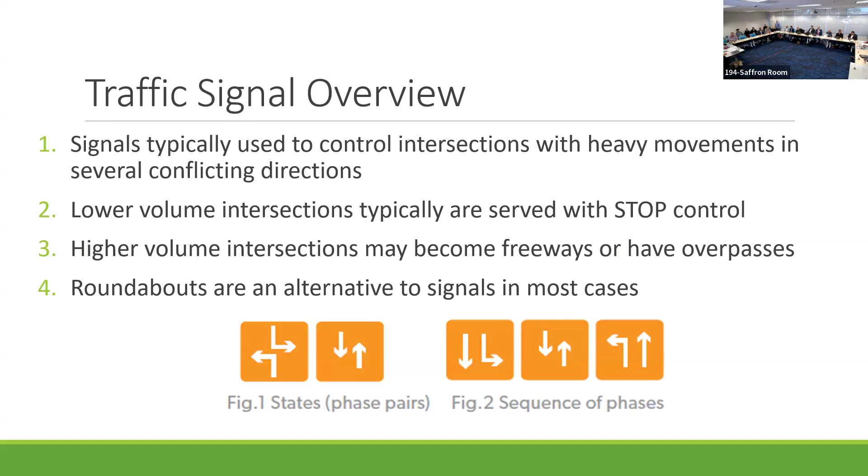I'm the principal engineer at TAMC, and we have an item in front of you today about adaptive signals on Highway 68 between Salinas and Monterey. I think everybody knows what a traffic signal does, but where it lies in alternatives: you usually use a traffic signal if you have a lot of movements going through an intersection that are heavy and all conflicting, basically they can't all go at the same time. Lower volume intersections typically can be served with stop signs, but you get collisions and side street delay concerns. So when you get to higher volumes, you either go to a signal, and if it gets that big, you go to an interchange or a flyover. A roundabout is an alternative to a signal in most cases, but we're not here to talk about roundabouts. What we're here to do is talk about what we can do on 68 to get the most out of the signals we have there today. There are really three operations that happen: we're allowed to do free and coordinated with the equipment we have now, but we are not able to do adaptive without doing some upgrades. So when you're free, uncoordinated, it's basically first come, first serve.

You rarely are sitting at the signal with no traffic going. It'll zip around and come to you pretty quickly when that happens. It's in a very well-defined sequence, and if you watch that signal, you'll know when you're next in line. It's very flexible in that it treats everyone evenly. It doesn't give any priority, so sometimes it'll give the side street a little more time than you'd rather have, because the main line is going to stop at every intersection. So you don't get any what's called coordination.

Coordination, you set up - and I probably could talk days on this. With coordination, you say I want the signal to run every 2 minutes. You do the side streets, you do the left turns, and then you just sit on the main line, in this case 68, and it's going to stay green on 68. Whether there's cars on 68 or not, it's going to stay green, and that allows us to coordinate them. With that synchronization, you can get a good progression through the whole corridor.

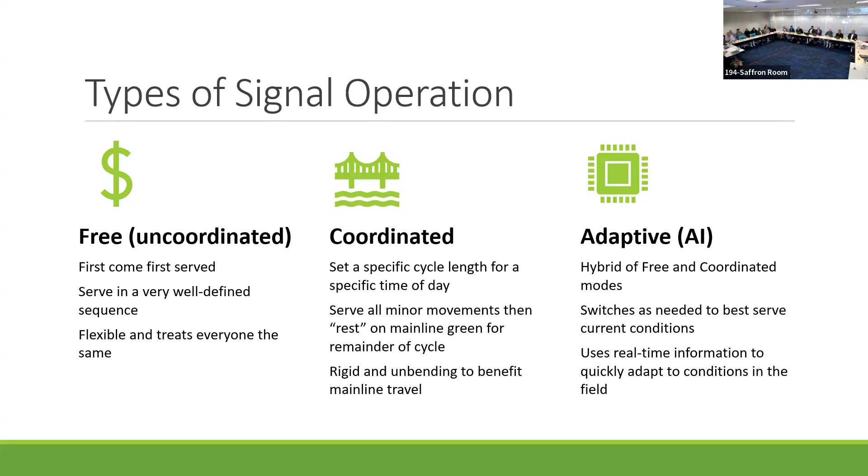And then we have adaptive, which is basically a hybrid. You get artificial intelligence involved, and it starts thinking - is it time to be free or coordinated? That's essentially what adaptive is. It's flipping back and forth between that. When it's free, it's making the best out of free. When it's coordinated, it makes the best out of coordinated. And the reason why it works is it gets real-time information - great information. We'll talk about that high resolution data, but that's the game changer.

So as far as I can tell, this is about all you need to know technically, but I could answer technical questions. Each one of these has its weaknesses and strengths.

When it's off-peak, light traffic, middle of the night, free's fine - it's probably the best option. If traffic's real light, you're good. If it's coordinated in the middle of the night, you're going to get nothing but complaints. People are going to say, I'm waiting here 2 minutes, and every 2 minutes I get my service.

Adaptive can work great. It could say, you know what, it's not light, it's moderate to light. And it can switch from free and say, you know what, there's enough traffic that we should do a progression.

Peak hour, heavy traffic, free is terrible because you're going to stop at every light if you're driving down 68. If you're coordinated, it's great - you just open up the floodgates. Caltrans just changed the timing plan on 68, coordinated Monday, and it runs so much better with the new coordination plan. It gave it more green time, opened up the floodgates.

Adaptive pretty much mimics coordination in this case. If you're going to open up the floodgates in coordinated, the adaptive will be great in that it might open them up a little earlier and keep them there a little longer, but at the peak of the peak hour, they work about the same.

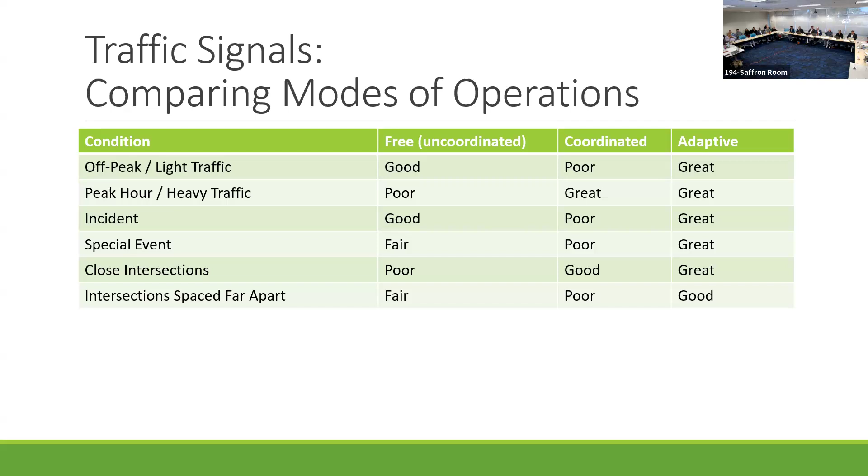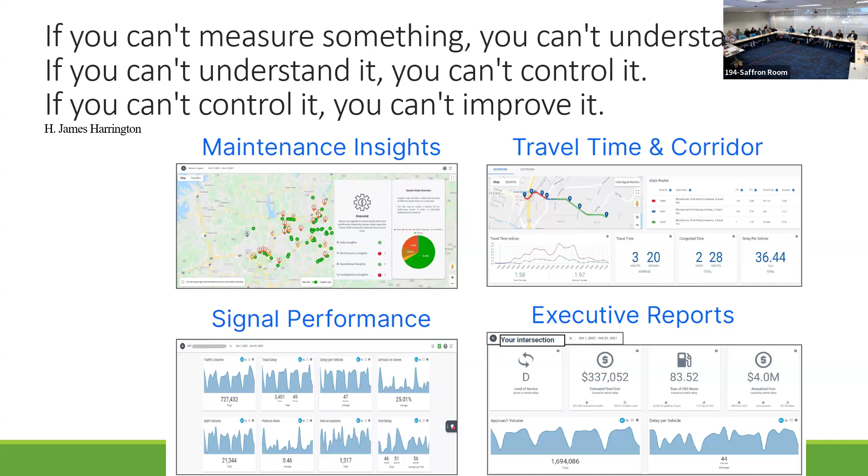The takeaway is artificial intelligence is learning. It's learning from a human. So you have this data, but you don't just push a button and walk away. It's going to be a commitment from Caltrans, I hope, to be looking at these graphs, to be looking at these things, to fine tune it, see what adaptive's doing right, what's wrong. Where I have seen adaptive fail is when staff didn't embrace it and they pushed the button and walked away, thinking it's artificial intelligence, it'll figure it out. It's getting better at doing that, but it does have to learn from mistakes, learn by doing.

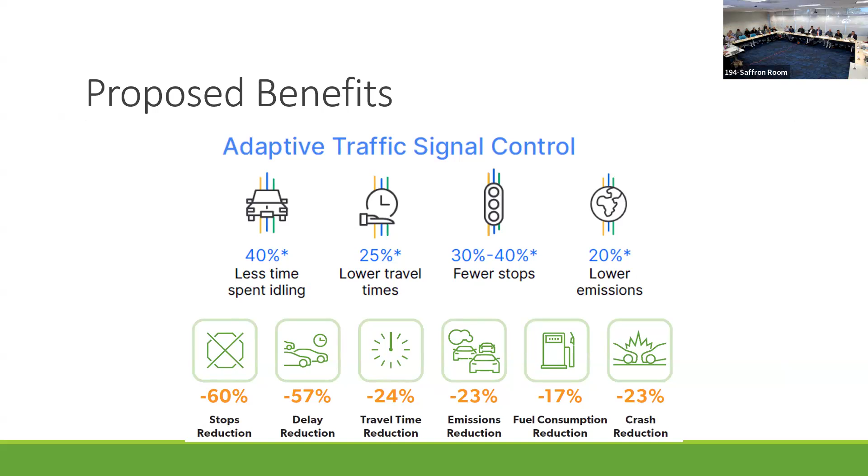And it depends on what you're starting from. So if you're starting from free signals, which a lot of these—I'll have to say that's probably what the vendor did. If I did it, I'd say the signals were running free on a big, busy corridor, and we got huge results. We're not going to get maybe the same results because we're already in coordination, but I think it shows here, it's very promising. Definitely something we want to do. Very excited to look at that.

And so what we're proposing is Caltrans. I'd like to introduce John Olejnik, the planning director, to give us an update on the Caltrans project, the pilot project that they submitted. Thank you, Doug.

And it's true, he is so enthusiastic. We love working with Doug on these projects because I learned a lot as well.

I'm John Olejnik, Caltrans District 5, our engagement and planning manager, and glad to be here today, and glad to be working in partnership with TAMC on this endeavor. While it's true we did apply for, but were not successful in, special competitive funding to acquire equipment, what we did acquire was approval to do this project along with TAMC. So that was good, and we're glad we've accomplished that. We're glad to be at this point now to help move this forward.

We'll be working from this point onward, with the cooperative agreement in place, to be able to figure out the means and the methods by which we get it installed. We want to see this play out. We're very curious to see how this pilot program will work. Certainly, these AI controllers are not a substitute, not a replacement for the need for the long-term overall improvement project, but it is something we're interested in piloting and seeing how things play out. We'll be working together as we go forward. So thank you.

So we have that update, and with that, it flipped back to something that was going to be maybe shared funding, where TAMC pays for the second phase and Caltrans would get the first phase. The pilot project, we flipped that, and now we're proposing to take on the first phase funding.

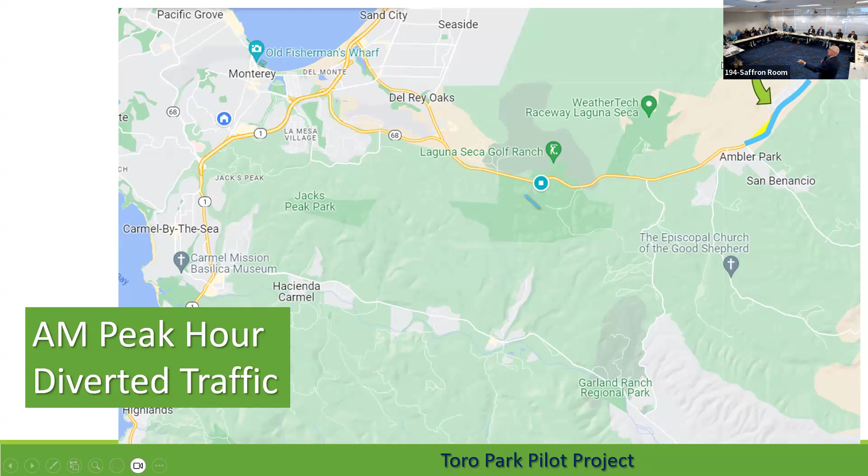This is all the traffic trying to get from Salinas to Monterey. They say Highway 68 is so blocked that we have to use this. I heard how bad the traffic was and envisioned this, and I said, I've been around, I've done this for 30 years, this isn't that bad. And they said, oh no, it's the neighborhoods. I get it, Portola was built for a little bit of extra traffic, and it's by a school. That's not desirable, we don't want that.

And what happens is, before it gets congested on that street, they start driving as fast as they can to beat the traffic.

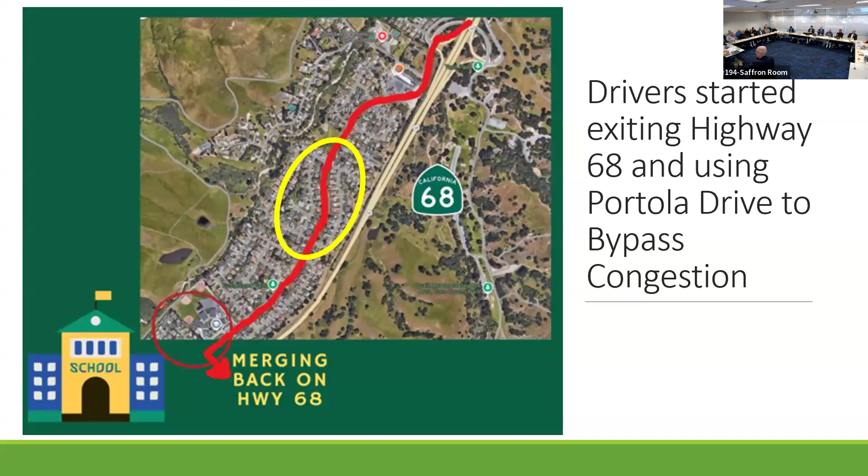So you have everybody we talked about from here to there is aggressive drivers trying to beat the traffic, maybe passing 5 or 6 cars literally to get just a little bit more, to get to work faster. And so what happens now, again, you have the school over here and this traffic coming down. And in this middle part here, when school is in session, you see this happening, and we call it bypass traffic.

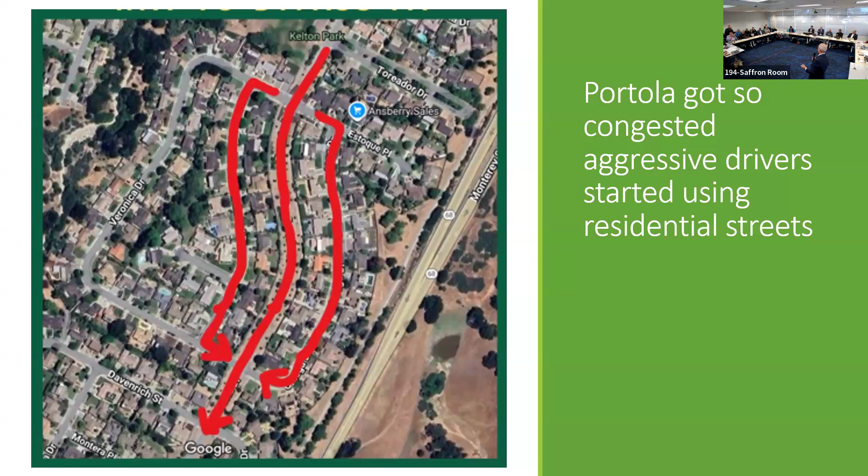Now, this is one that I had never seen before. And when I got to this point, I was like, this is a different animal. This is something that just is not acceptable. What I mean by that is, this is a residential street. And this happens regularly every morning.

And when people said they couldn't get out of their driveway for 20 minutes, I thought, you guys are exaggerating. And then I went out there and saw that. I said, you guys are not exaggerating. This is crazy. This is not what the road's built for. Your roads are going to break down. Your pavement's not designed for this kind of traffic.

The people literally, when they get out of their driveways, can't move out of the way without going the wrong way, and I have tons of pictures. Other places I think is exemplary, but people start driving the wrong way on a street. They start passing dangerously. We're all in a school zone.

So, not desirable. So how do we build consensus on this pilot project? In February, Toro Park HOA invited us, Todd and I went to a meeting and we looked at each other and said, you know what, we'll study it. And that's what I found out in the field, I said, you know, we've got to do something.

And again, when we said 6 to 12 months to design an adaptive system, which is probably one of the easiest designs you can do in traffic engineering, look at the timeline we did on this. It's remarkable. April 3rd, we had our first workshop with the community. That's February to April, we have a meeting and we kick off the project.

We set up a traffic committee from members of Serra Village and Toro Park. We're no longer associated with either HOA, in that we don't ask them to vote on it, and we're not getting input from the HOA officially, but we've used them as a good connector with the community. So they identified people from each part of the neighborhood that would help us design.

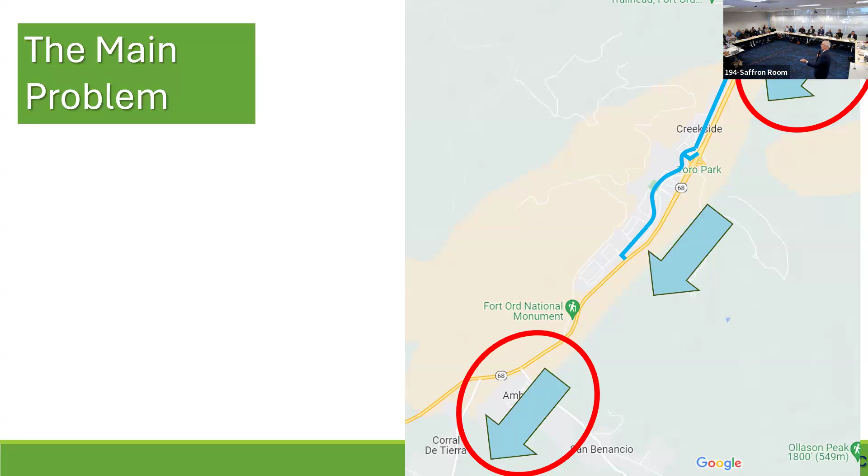So you have to remember, we're not changing those, we're changing what's in the middle. And what you have is, instead of a lot of traffic going on 68, about half of it gets off and comes back on. And it just doesn't work at all.

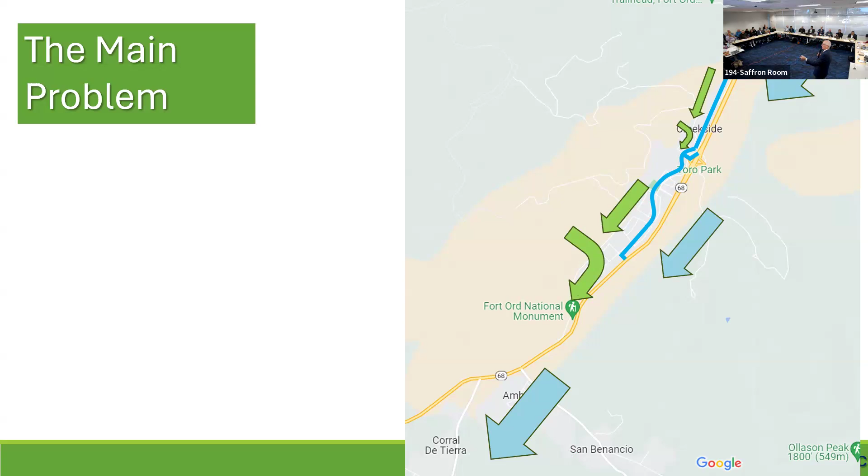And so phase 1 was, let's get rid of this exit traffic. So we blocked the exit traffic. And then what that did was, a lot of people in the neighborhood who were getting out on this right turn, we blocked the through traffic, but we also redirected all the neighborhoods. So you're going to see, and we'll get there, all the people on the west side of Toro Park now have to go all the way back, do that U-turn, and get stuck in that terrible traffic. That is really a negative about the implementation that we have to address.

So now all of a sudden you have more traffic on 68. We're kind of back to normal until people started getting off at River Road and going in there. Now they're getting off on Portola and just getting off and getting back on. When you see this dire need to make a 5, maybe 3-minute difference in a commute, you just see bad driving decisions.

So what we did was we tried to teach them, say, we got to do phase 2, which we already had gone through. We just didn't know how quickly it was going to, or if it was going to be needed, but we did this systematically. We got rid of the Creekside entrance, and then the same thing, it went to a U-turn. So now we're pushing the traffic back on.

In an ideal world, we wouldn't have had any change on Highway 68. It would have been the same traffic from Salinas, the same traffic going to Monterey. However, what's been happening gradually, and it happened for some reason, the Imjin Road project, a lot of traffic started using 68 for one reason or another. Even though the construction was going on for a while, we got a bunch of traffic there. Davis Road got closed, a lot of traffic came over. Hitchcock, a lot of traffic came over.

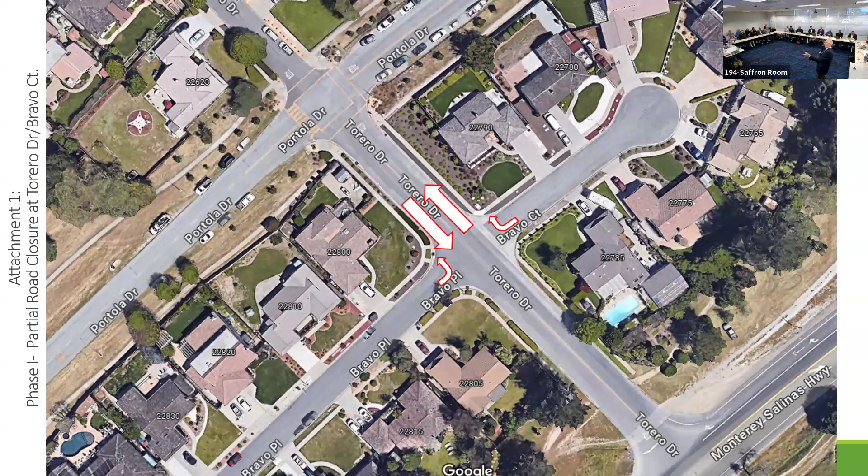So this is where we are now. I'm going to just take a look, for those that didn't know exactly what we did. Torero Drive was closed, and it looks like this. So that's not the most attractive thing, but it's a pilot project. Remember, the time we got it in, we got this in before school started in August, and we were asked to study it in February.

That's a tremendous turnaround. So what happens if you do not follow the signs? CHP has been out there, they've been one of the best partners. Jessica's just been a phenomenal leader. I'm sorry she couldn't make it here, but I know she's busy writing tickets. This was literally, we were talking, and this guy looked both ways and went right past it. So it was pretty startling the first day.

I drive there pretty often, that's my commute to work. I don't see many people, but of course, if everybody followed the rules, we wouldn't need police officers. It's done a good job here in that the few people that I see doing it, it's not usually in the peak hour, and we have a plan on that, but yeah, it's worked good in the peak hour.

Before, there was 550 trips making a right turn, and most of that was cut-through traffic. Maybe 100 was the neighbors, and 650 trips on 68. That's a 50-50 split. Half of the people that need to use 68 were saying, I'd rather drive through the neighborhood. It just didn't make any sense. And what was happening for those that drove it, it was almost like a stop sign installed at Torero, where it's I go, you go, I go, you go.

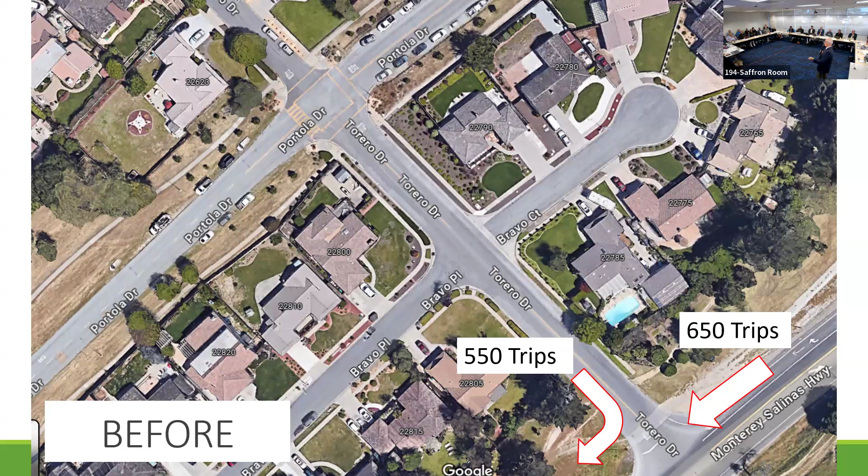The very generous drivers were terrorizing the flow of traffic on 68. It was terrible. So what we did, we got rid of those right turns to zero. I think we counted 3 per day, and then it all went on to 68. And I think I said earlier, we did finally get the traffic signals. We tried to get the traffic signals coordinated 6 months ago, 5 months ago, 4 months ago. We got it done Monday. So we got the first step, and again, adaptive will even make it better.

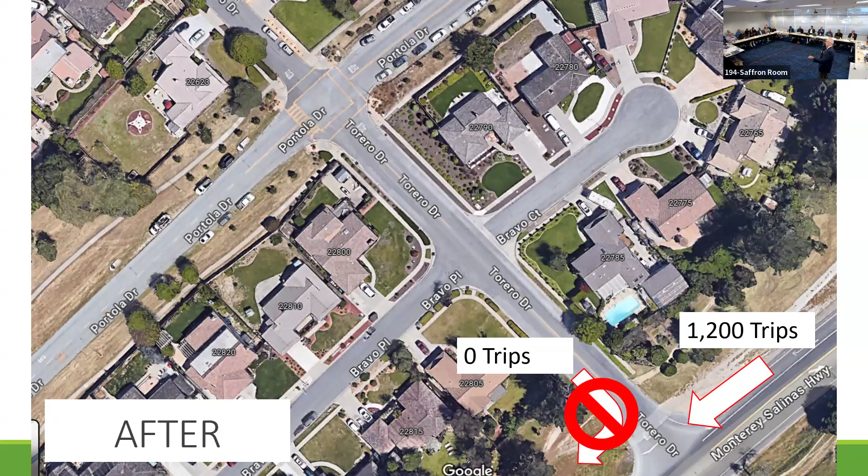But a little bit of the frustration was that the signals weren't put in. The coordination was done in collaboration with this, a little offset. And so when we got that extra 1,200 trips down, they were just stacked up, and we had quite a bit of backups.

So this is probably more, I just was kind of impressed with how much we did, and the people here. I think there's quite a few members. Harry, Terry, we have so many people that are part of the neighborhood that helped out taking counts. Harry was out there helping us monitor, and that's what we did. We put something in, we looked at it, we adapted, we did the next phase, and now we're at a point where we ran a community workshop, our third one.

School started August 7th, and a week before, the school district said we really have a problem with our drop-off area, can you fix that too? So with 4 days before our kickoff meeting, we put in the project and it worked good. The school district asked for help with the design, and I said sure, I'll go out there and see what I could do.

It was pretty bad. That big X shows how traffic was going through - it was terrible. So we fixed that up. We put some temporary improvements there the day before school. It's not pretty, but it works.

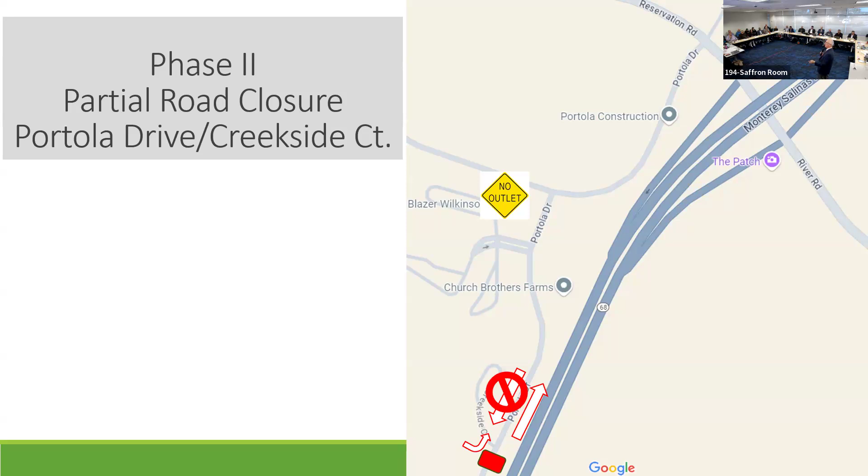Now, what it did cost us is the next question. But here, we had about 250 trips coming through, and it went down to zero. So it worked - what we wanted to do was get rid of the cut-through traffic, and it has worked great.

On October 8th we did a workshop, and I'd love to go over this - it's pretty neat. We asked two questions at the same time. We go into depth in the staff report, but it's not fair to ask do you like this or not and just see who raises their hands. So instead we asked where do you live, and broke up the groups by location before asking the same question.

The people more west on Toro Park, I could confidently say, are going to be opposed to it because they had to lose those U-turns - they got the most drastically impacted. As you get closer to the interchange, that group says this is the best thing that could ever happen to us. As you get to Creekside, they're like this is terrible, but on the other side of the barricade they think it's great. So it's not fair to say we have a consensus in each area of the study area.

But it was pretty neat - everybody got in there, put the dots up, and I got some statistics for anyone that's crazy about that.

It was pretty cool. We asked this question: what do you think coming here tonight, and what should we do next? So we asked 2 questions, and if you have some time, I think it's a really neat survey tool.

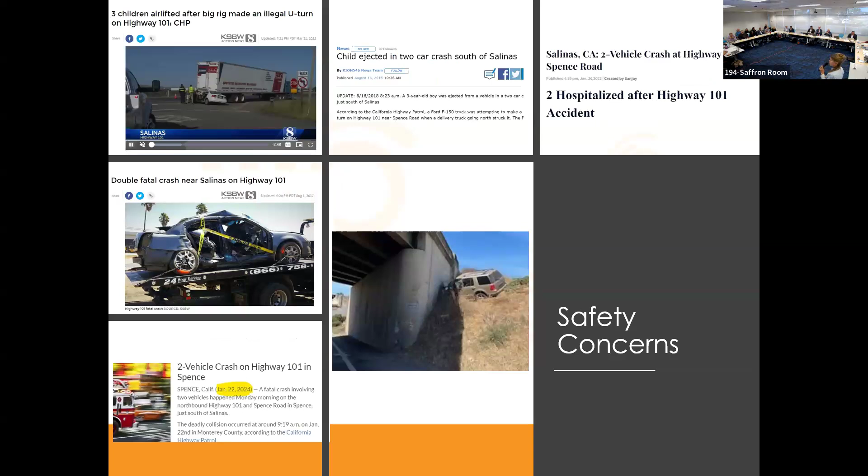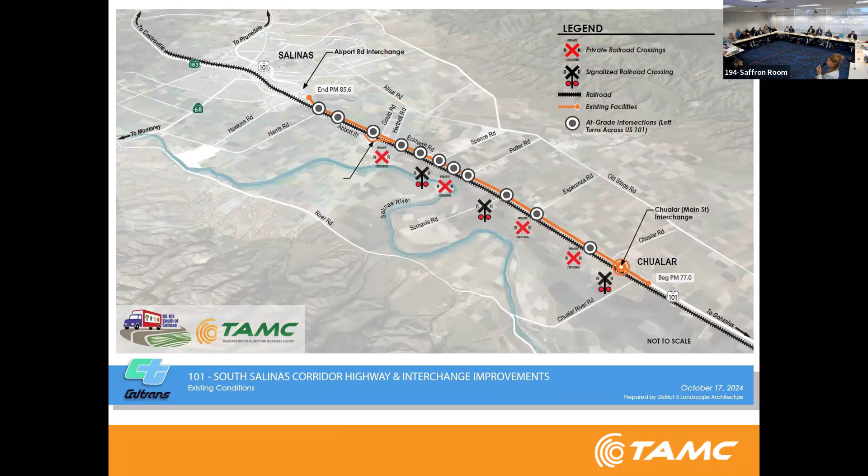There is a safety concern in the Highway 101 South of Salinas corridor between Chualar and Salinas. This is a graphic we showed 2 months ago. This is the extent of the project area, extending from Chualar at the south end up to about Airport Road at the north end, addressing the 11 unsignalized at-grade intersections, shown with the gray dots, and the railroad crossings, shown with the black X's and red X's.

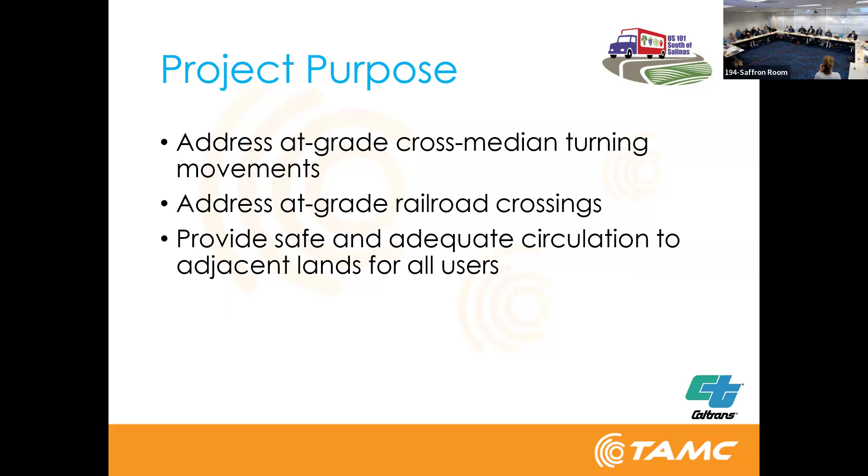The purpose of the project is to address those at-grade cross-median turning movements through those 11 intersections, and to also address the at-grade railroad crossings and the current vehicle use across those crossings. In a broader sense, as part of addressing all these safety concerns, the goal is to provide safe and adequate circulation for all adjacent lands, all existing land uses, and all users in the area.

So project improvements, generally speaking: we are studying constructing a new relocated interchange for Abbott. Currently we have the left on, left off ramp at Abbott, and we're looking at reconstructing the Abbott interchange. We're also looking at relocating and reconstructing the Chualar interchange. Along with those new interchanges would be local roads connecting them on both the west and east side of Highway 101 through the project corridor, and incorporating some level of access control, reducing the amount of ingress and egress directly on and off of the main line of the highway.

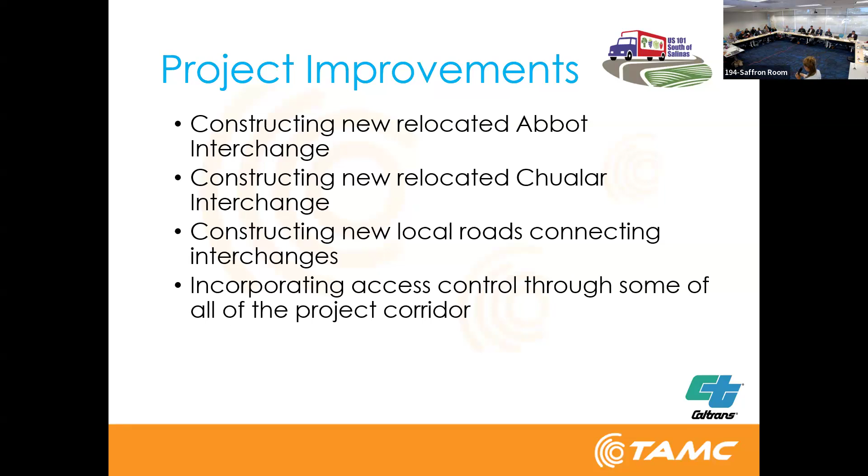As for outreach, what we've been doing extensively, especially the last 6 months but certainly the last year I've been on the project, is talking to people. Starting about 6 months ago with a meeting in Chualar, which I consider very successful, with Supervisor Lopez helping us, we've begun really intensive engagement with the stakeholders in this project area. We went to the community of Chualar, sat down with folks, did a presentation, had a lot of ears in the room. We dialogued, it was a bilingual meeting. We spent a lot of time talking with that community to get a better sense of their needs, and we got some really clear messaging that was helpful to us in our goal this past year of better defining the alternatives we're studying in our environmental review process.

We've also talked with the city of Salinas. We're in close contact with County of Monterey, especially the Public Works Department. We've sat down a couple different times with the Ag Land Trust to understand their perspective on protecting ag land. We've had multiple meetings with the Traffic Safety Alliance, mostly hosted by the Farm Bureau, and within that group, and separately too, engaged with both CHP and fire. I'd consider all of those meetings really productive to our group. They've informed us and helped us continue to identify the constraints on the various options we were looking at for the project, and narrowed down what the alternatives will be that we'll in fact be studying in our EIR.

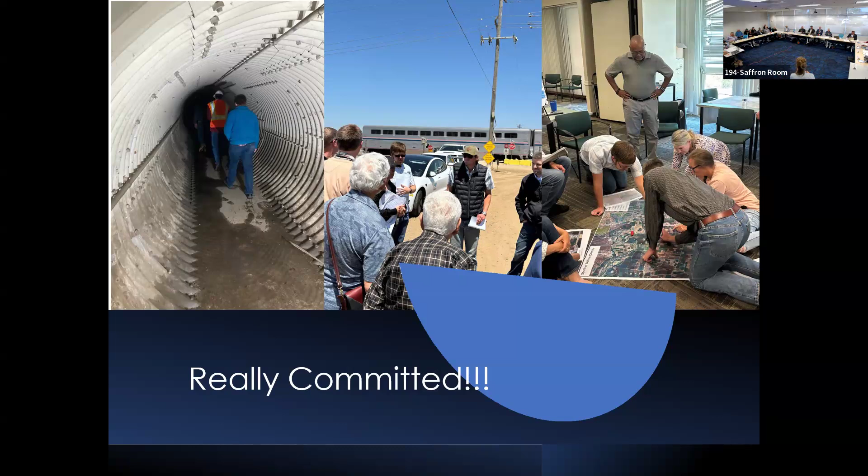So fun sidebar there. All that to say, we've been getting out in the field and we've had a lot of successful meetings. I can't say we've engaged with every single property owner out there, but we are trying. We've sent multiple letters out to folks, we've met people at their properties, we've talked about different concerns. And as you all know, sometimes this person's concerns are 180 degrees opposite of that person's concerns. So we're taking all that into note and really thinking about how to come up with alternatives that we can study that make the most sense for the needs in the corridor.

So things we've heard, and I think Doug may have shared a little bit of this last time when we were in the middle of our outreach process. You've probably seen some of this list again, but folks out there really want a long-term plan, and that's what this project is working on.

Prime ag land is very important. We know that. We're thinking a lot about how to find solutions while minimizing impacts and also protecting the precious ag land in Salinas Valley. We need to make sure that every property continues to have access and that the existing land uses can continue to operate smoothly and easily, for residents, businesses, and so on.

The existing interchanges are also a concern. It would be greatly impactful for us to close the existing Chualar interchange or Abbott ramps during construction, and that's part of what's influenced our decision about the alternatives we're going to study, which I'll share more about in a moment.

Airport Boulevard interchange is an issue. This project is a safety project, and it wasn't originally developed particularly for Airport Boulevard, but that's something that's been brought to us in numerous conversations we've had, and it's something we're aware of and thinking about.

And then there's the relocation of the interchanges. When we talked to the community of Chualar, what we heard was that they'd like to regain their community. They have a lot of trucks going through their community right now, a lot of dust, dirt, and noise. As with the conversation at Torero and the bypass, there are children in that neighborhood and they want a feeling of community. So we're looking at relocating Chualar but keeping it as close as possible to that community, making sure it stays connected. We've been thinking a lot about how to get the interchange out of town but keep it really close, and also about relocating the Abbott interchange closer to Airport Boulevard.

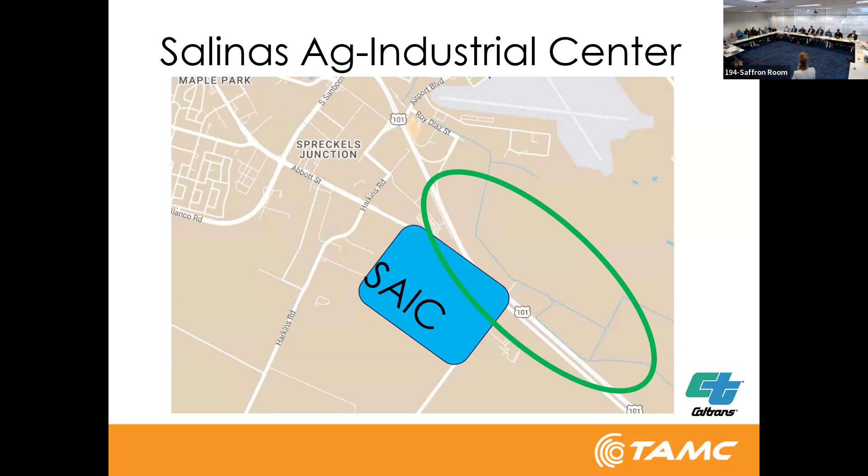Oops, I might have double clicked.

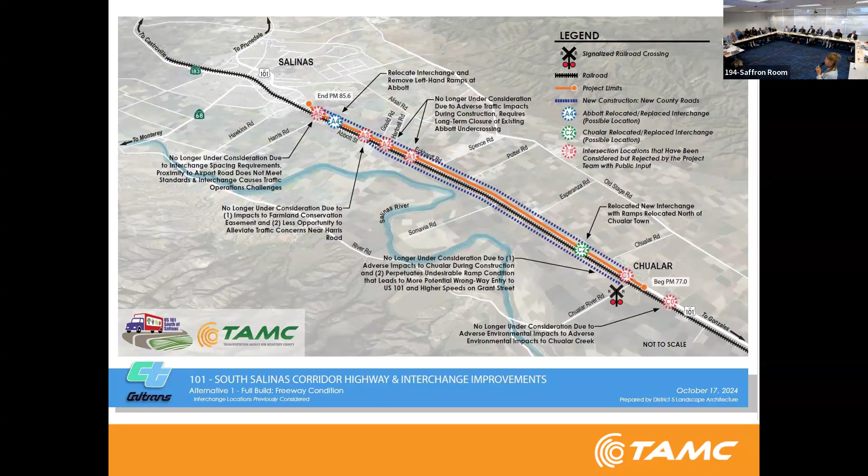For our environmental review process, we have 2 basic alternatives we intend to look at. The first is what we're calling a full build freeway condition. We have the relocated Chualar interchange, a relocated Abbott interchange, and frontage roads on both the east and west side of Highway 101. All intersections are closed, with no direct access onto the main line. If you're at any property on either side, you'd have access to the frontage road, traveling up or down to either the Chualar or Abbott interchange.

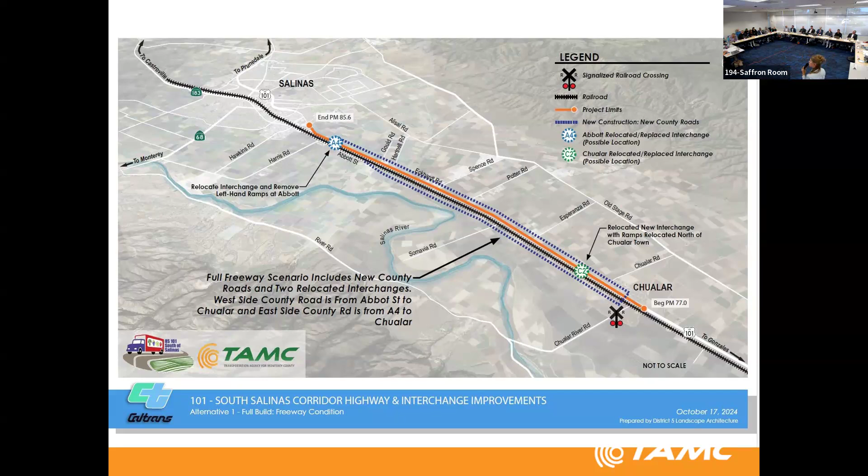Our second alternative is what we're calling a hybrid expressway condition. It's fairly similar, still showing the relocated interchanges in the C2 and A4 position, but in this alternative we are not doing full access control on the highway. There would still be, as denoted by the yellow arrows, two local roads, Potter Road and Esperanza, as well as two driveways where drivers could make a right turn onto or off the highway, but no left turn movements through any of these alternatives. The center median of the highway is closed in the hybrid expressway condition, but the right-in, right-out access would remain south of Spence Road on the east side.

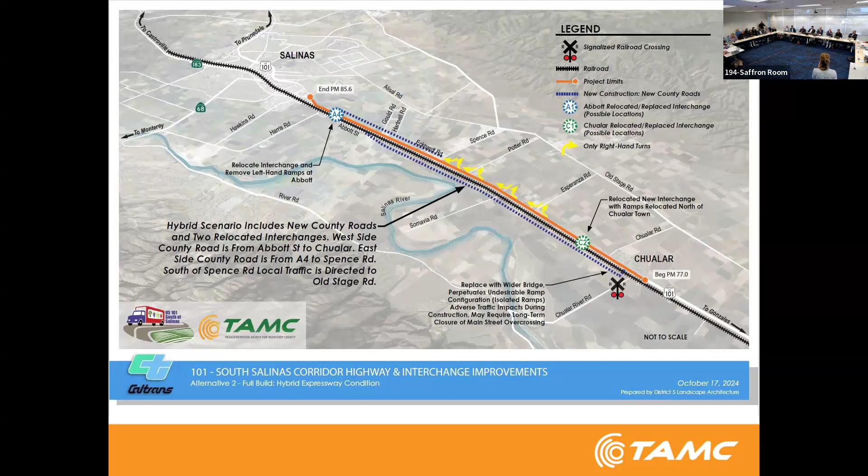So what's happening this week? We've been running like a hamster wheel in our office for the last few weeks, trying to get all our graphics ready, posters, information, handouts, and sign-in sheets. We're excited because this afternoon we're having the first of 2 notice of preparation meetings here in the community. Today's meeting is being held at the Ag Center, the Ag Commissioner's Meeting Room, this afternoon from 4 to 7.

Tomorrow we will have a bilingual meeting at Chualar School, and Supervisor Lopez will be there helping to host that. We'll be holding basically the same meeting both days. We do plan to have translators there today as well, to make sure we're fully covering equity and any Spanish-speaking stakeholders we have today.

We have translators available both days, and all of our exhibits translated into Spanish for our meeting tomorrow. The project, because of its complexity, will be preparing an environmental impact report, and as part of that process our team is required to notice the preparation of the report. So we've sent mail notices and email notices to politicians, regulatory agencies, and property owners, and we've also extensively noticed this meeting to the public.

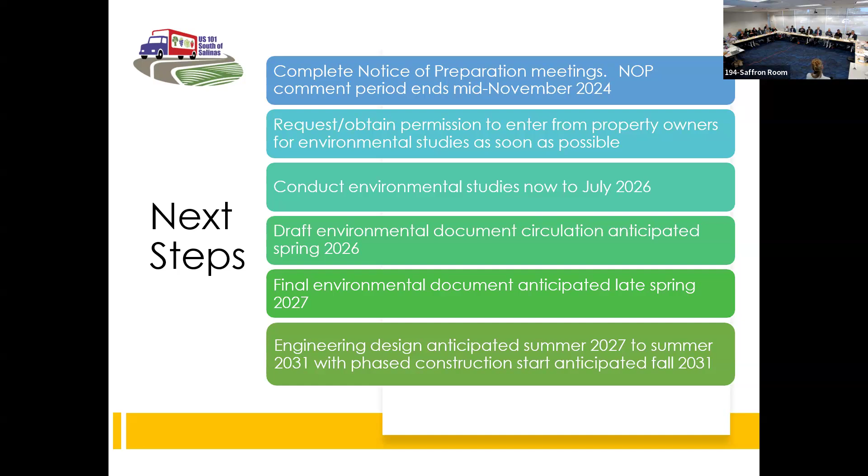Remember that. Yeah, and I just want to say, maybe Carl will add, MST now has so many people, an increase in ridership on MST that Carl and staff have had to add more lines. Was it line 21? 23, from King City to Salinas. They had to, I think, double the buses because the buses were getting full and people were holding on to the stanchion, and because of the situation, if something were to happen, it would be more dangerous. So they've had to adjust how the lines and the amount of buses there due to the increase in ridership.

I'll just add again, going back to the safety project. That is why the safety project has been initiated, because of just what you're describing and the experience that the CTC had that day. I mean, not triggered by them specifically, but by our monitoring of the collisions through the area.

Just to speak to that, MST did experience some years ago an agricultural vehicle pulling out and striking an MST bus, resulting in a handful of our passengers being removed from the side of the freeway by emergency medical vehicles due to the injuries they sustained. And due to that, we've recently had an influx from the community colleges and state colleges, a 30% increase in enrollment this past year. We noticed in August, like Doug mentioned, with school coming back in on Highway 68, we saw the same surge in ridership along our buses, especially on line 23.

While the state does not have a prohibition against folks standing on buses on state highways, and many of our peer agencies allow it, say along the 880, 680, Highway 99, those roads all have closed access to the freeway. MST will be advocating for the option that closes access to the freeway and requires everyone to come out safely via a controlled ramp, because this is one of our busiest routes and we can't have passengers hurtling through the bus in the event of an accident, as you experienced while seated. Imagine standing and that.